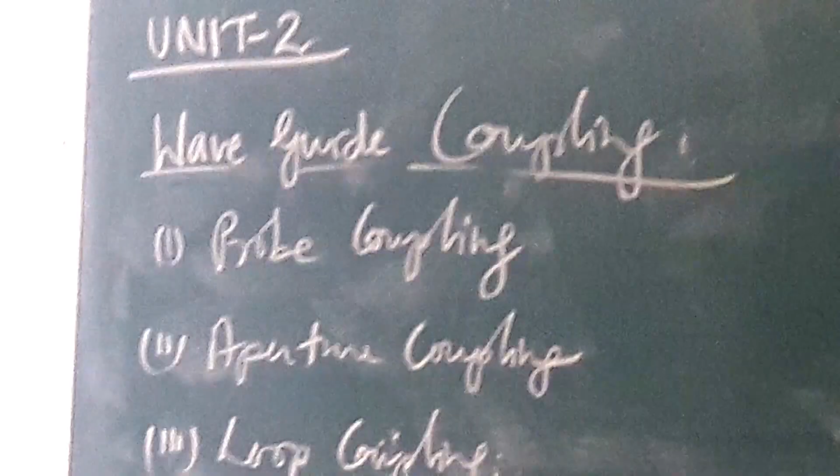Waveguide coupling. Coupling means we are coupling two or more waveguide components so that we can transfer the energy in or out of the component.

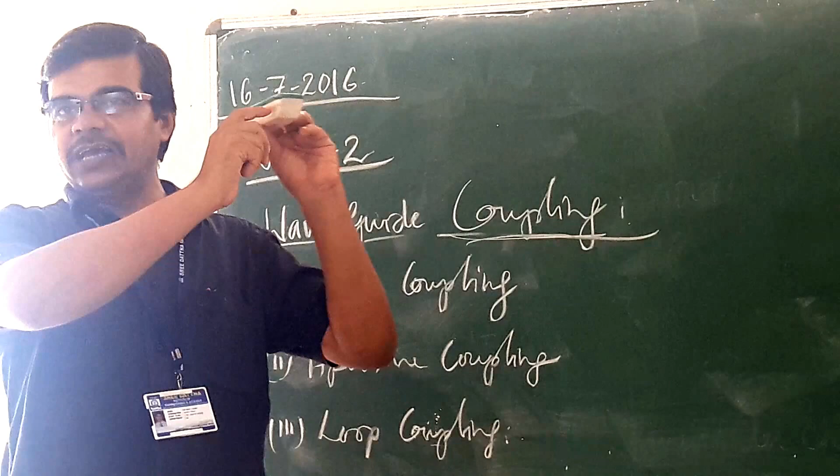Suppose you have one waveguide and you connect some other component to it. You know that in your waveguide you have electric field and magnetic field flowing. So either I can take a part of that energy out, or from this coupling component I can insert some energy into this waveguide. That is the activity we go for in coupling.

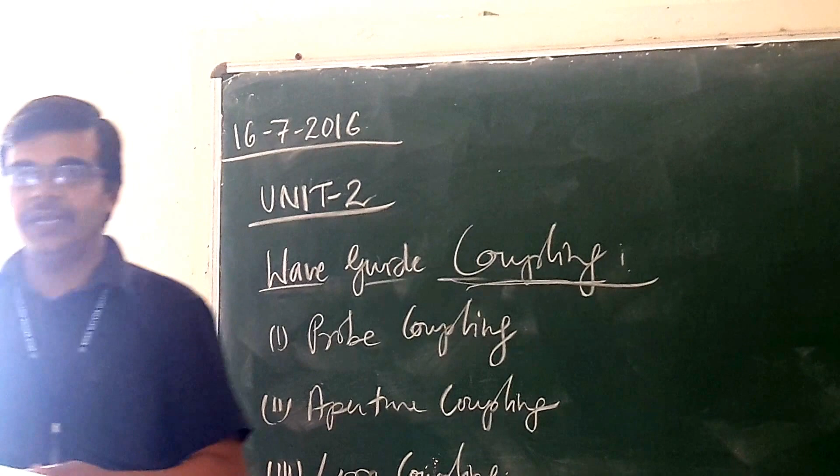If we go for waveguide coupling, we generally have three different types: the first one is probe coupling. In probe coupling, we couple the waveguide with respect to a coaxial line.

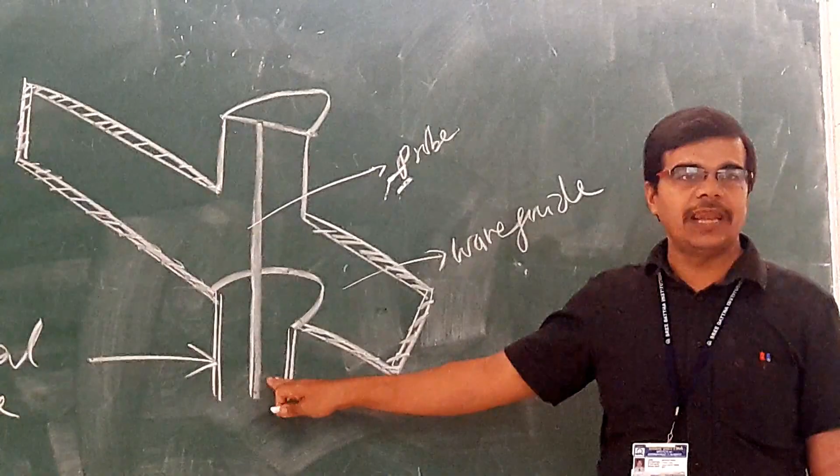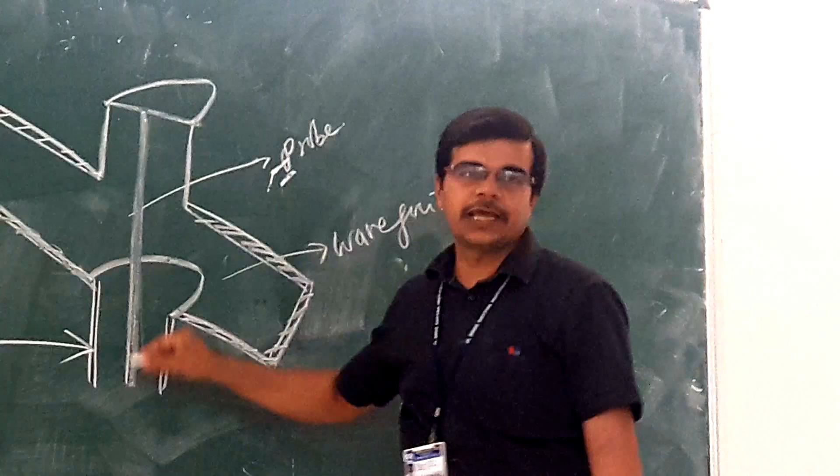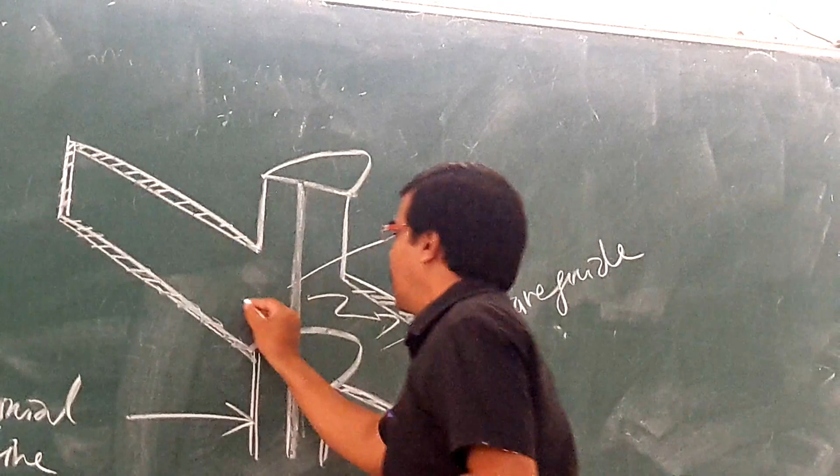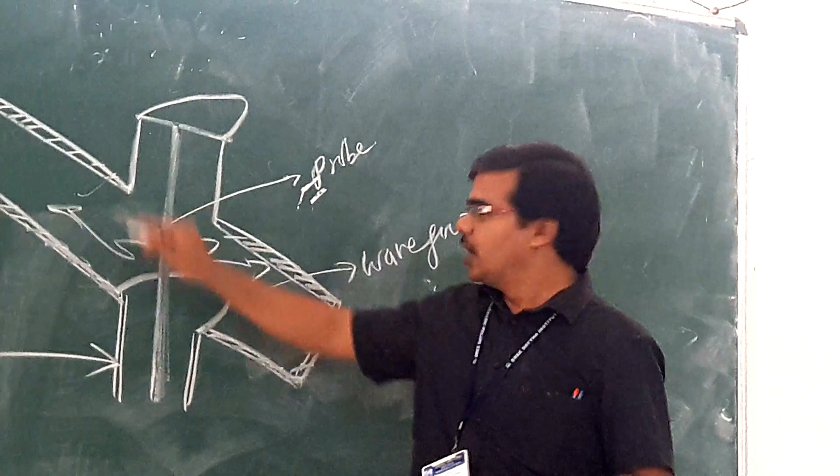This is your coaxial cable and this is the inner part of your coaxial cable. Since this coaxial cable is metallic in nature, we can use this probe for transmitting the energy into the waveguide. There is equal distribution of energy from this probe to the waveguide, so we can say this probe acts like an antenna.

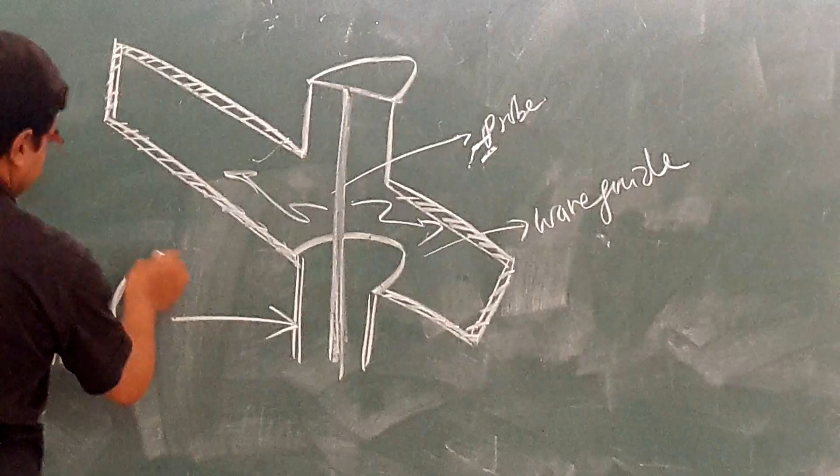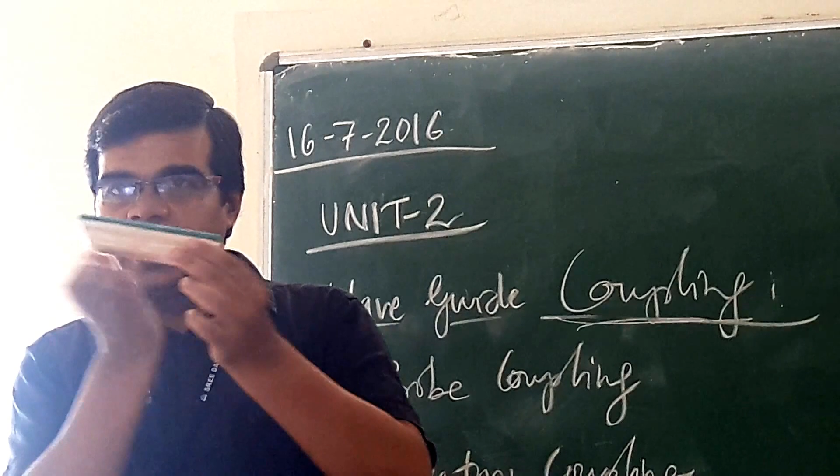Now looking at this probe, assuming this is your waveguide, whenever we insert the probe we insert it at the wider side. This is the wider side - here we have to insert it, not on this side.

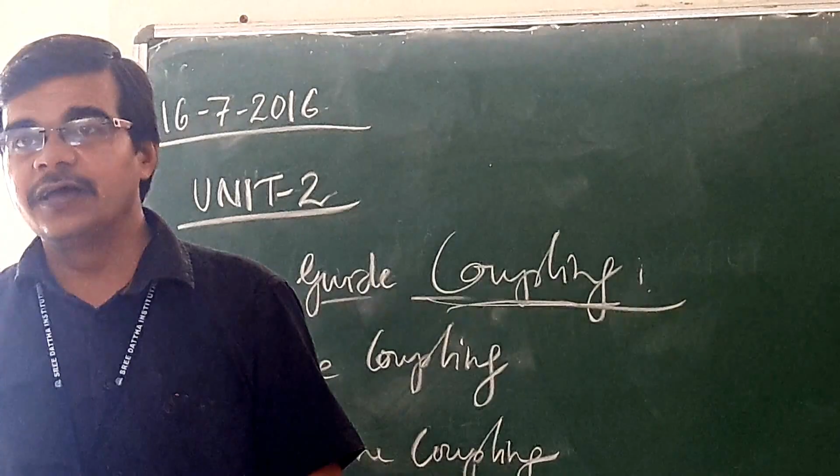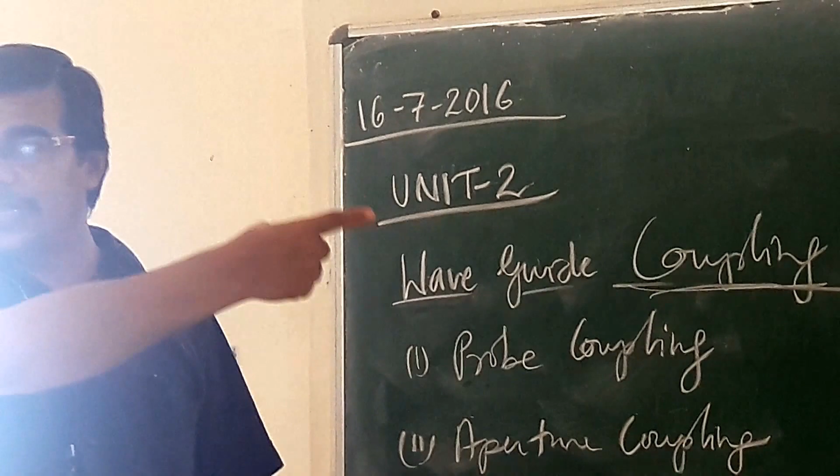Whenever we insert at the length side, it should be at a distance of lambda g by 4. What is lambda g? If you have this waveguide, you first calculate the guide wavelength for that waveguide, and then you can calculate at what distance you have to insert the probe.

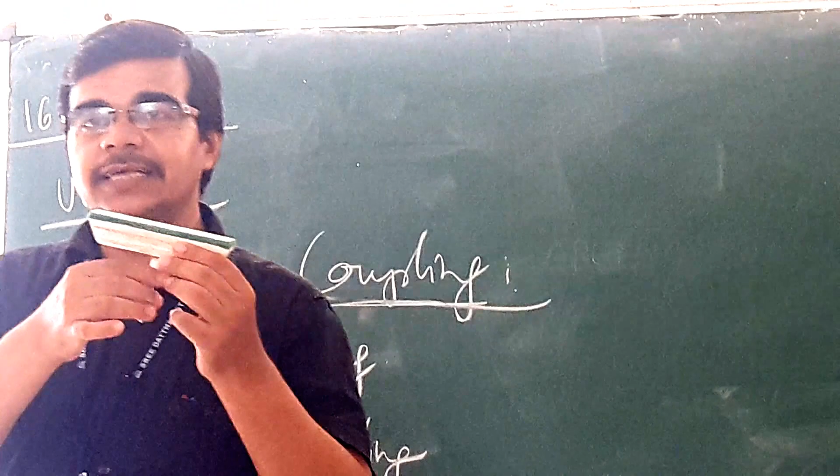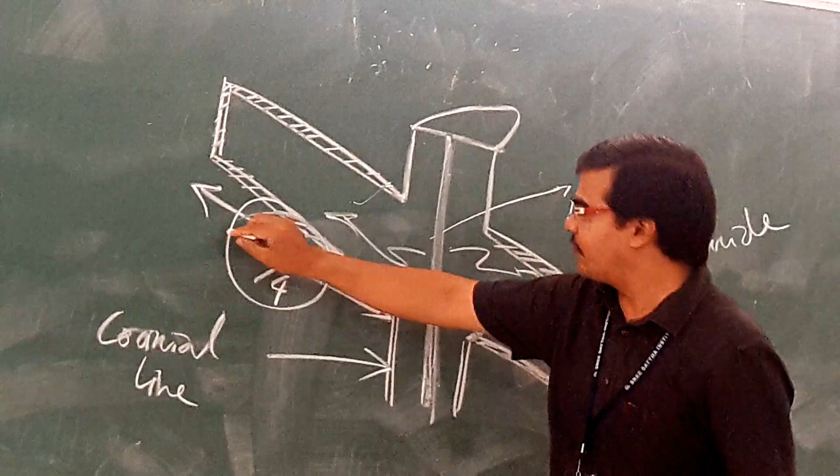Whenever we insert the probe, we have to insert it at the center of the wider side. When we insert it at the center, at a distance of lambda g by 4, it will perform well.

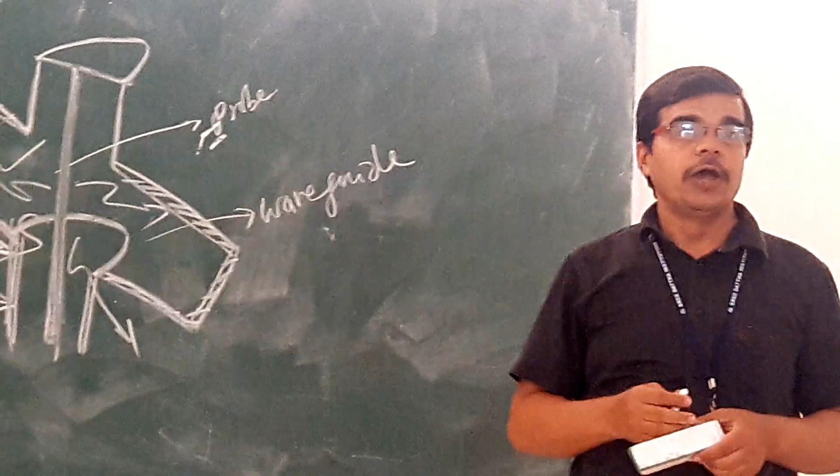If we don't follow this, there may be chances of mismatching between these two components, and some energy may escape. Ideally this is not required - we want proper matching. To have proper matching, it should be at a distance of lambda g by 4, at the wider side, and at the center.

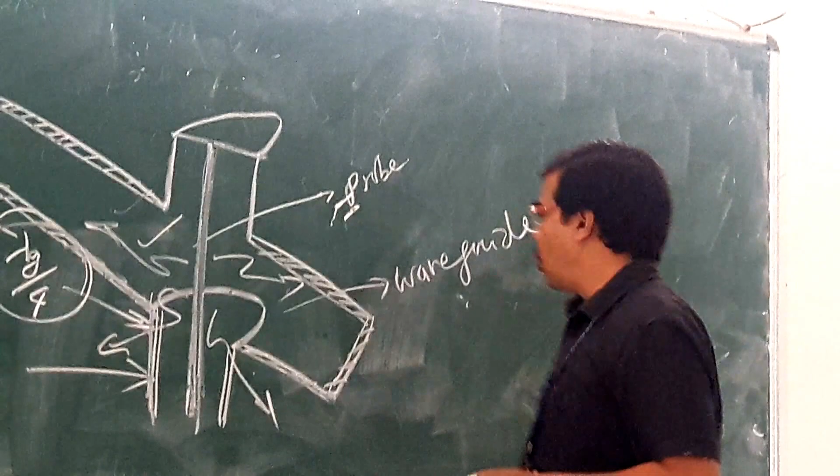If we see the probe, it is parallel to the electric field, which is concentrated at the center. You will not have that much electric field elsewhere, only at the center it is concentrated. So as the electric field is concentrated at the center, we insert the probe there. As it is parallel to the field, probe coupling is also known as capacitive coupling.

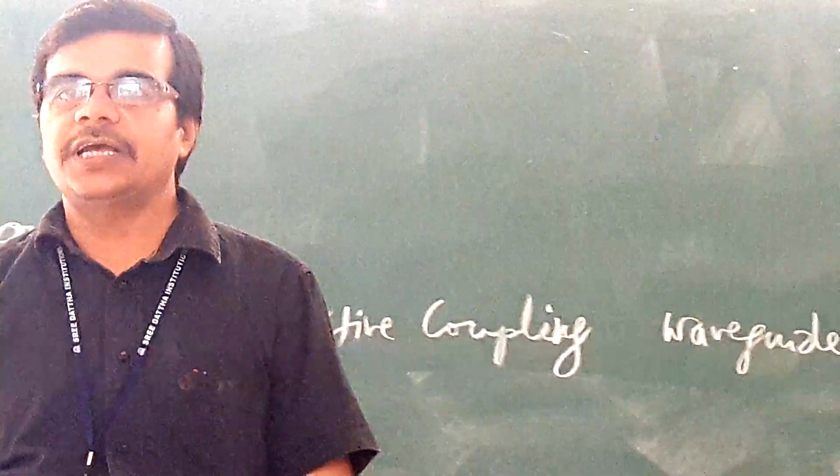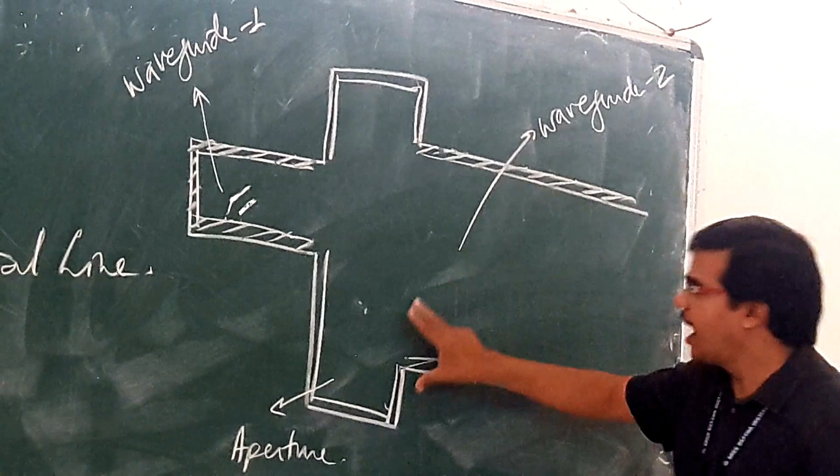Here we go for aperture coupling. This is also one way of coupling between two different components. Here we have two different waveguides having different physical dimensions, and we couple them. In a waveguide, energy exists in the form of electric field and magnetic field.

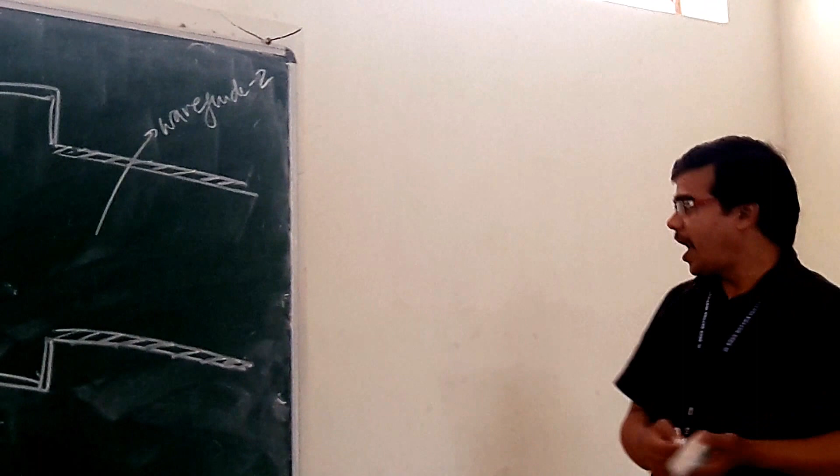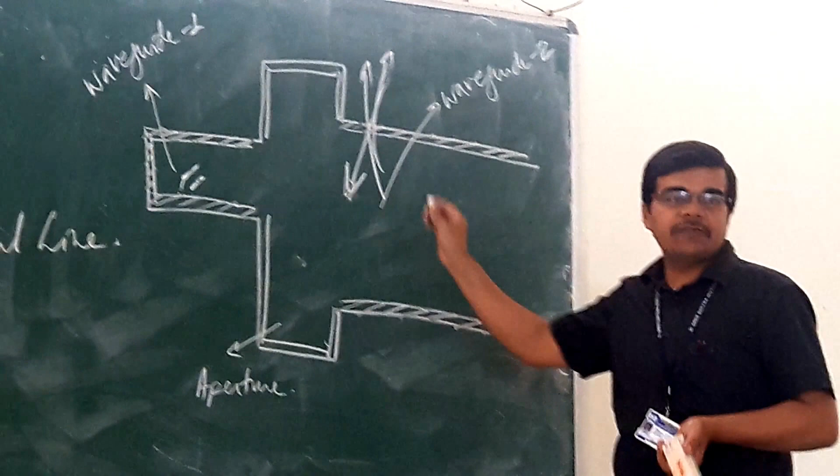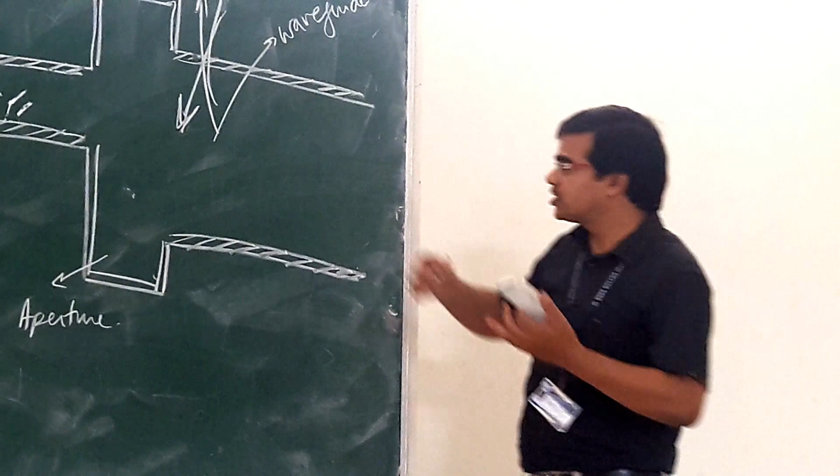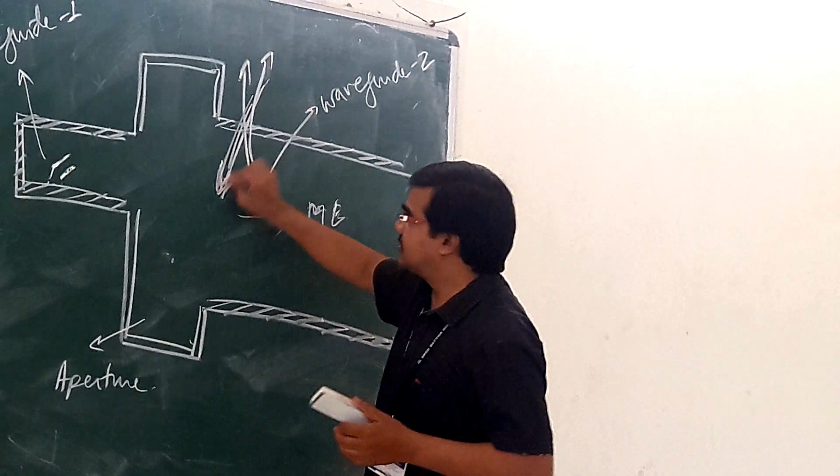Through this hole, the electric and magnetic field get disturbed, so you get uneven distribution of the electric and magnetic field. Where you have more electric field or more magnetic field, on that side you will see the transfer of energy taking place. By inserting the hole, we disturb the balance - some energy escapes through this hole, and the distribution of energy becomes imbalanced.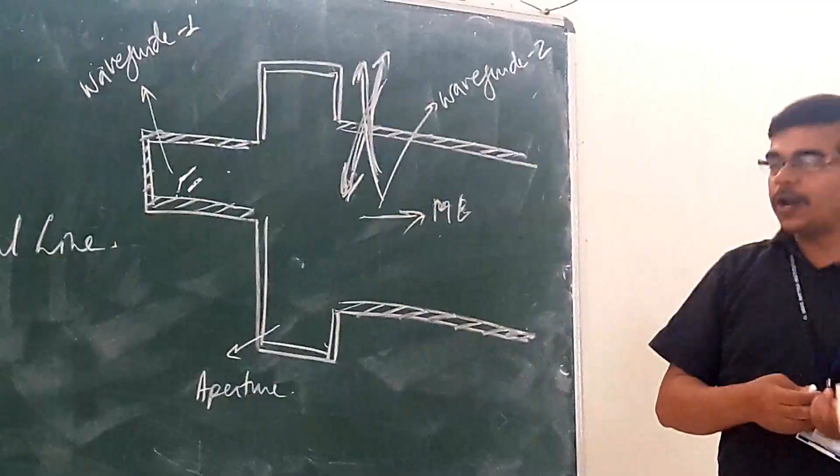This is your aperture coupling, which is also known as slot coupling. Next is loop coupling.

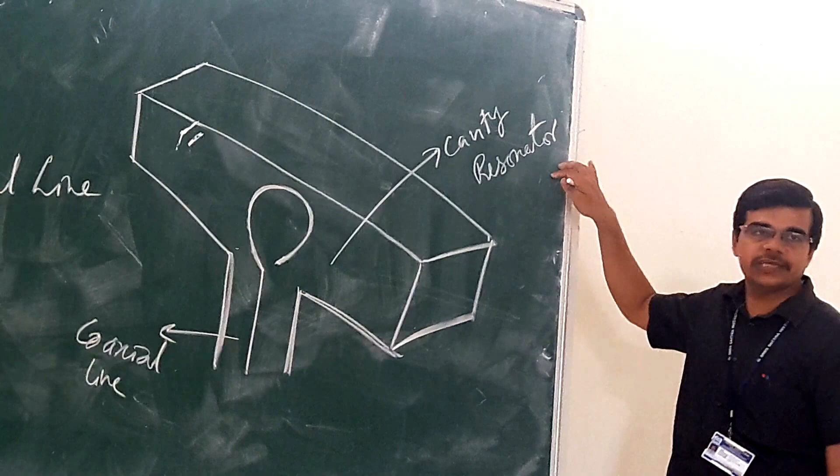Whenever we go for loop coupling, it is the coupling between a cavity resonator and a coaxial line. In probe coupling, we have waveguide and coaxial line; here we have cavity resonator and coaxial line. So what is the difference between the waveguide and this cavity resonator?

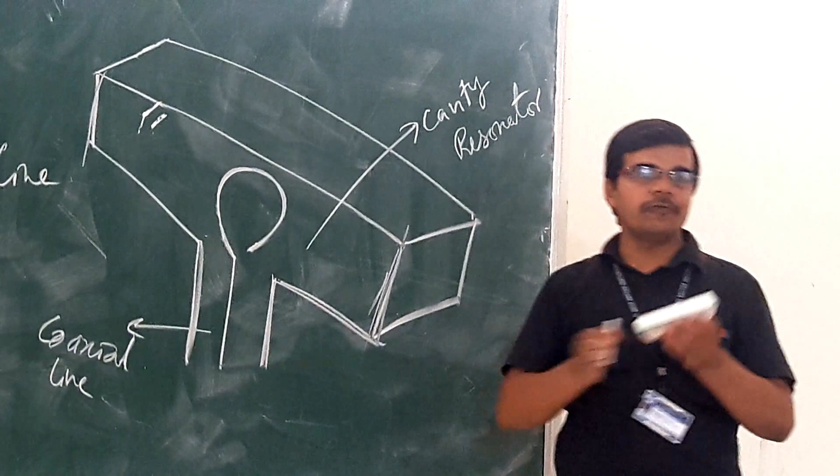The cavity resonator has a finite length - this block shows that it is of finite length. In other words, from a waveguide we can take a part and form the cavity resonator. We go for coupling here.

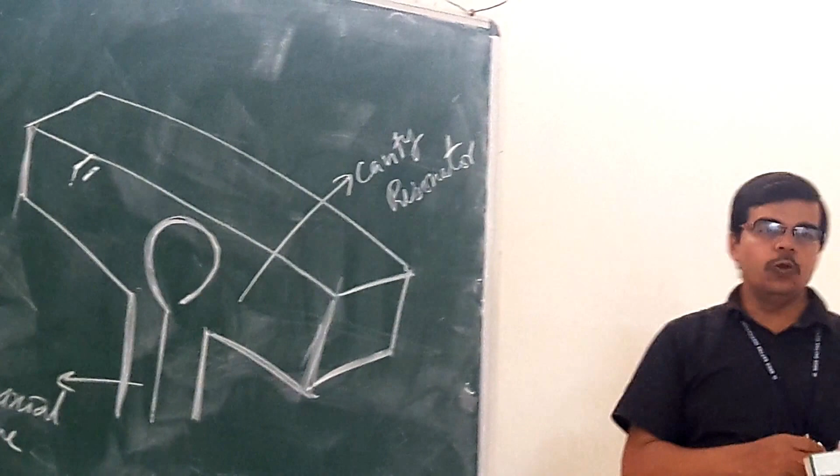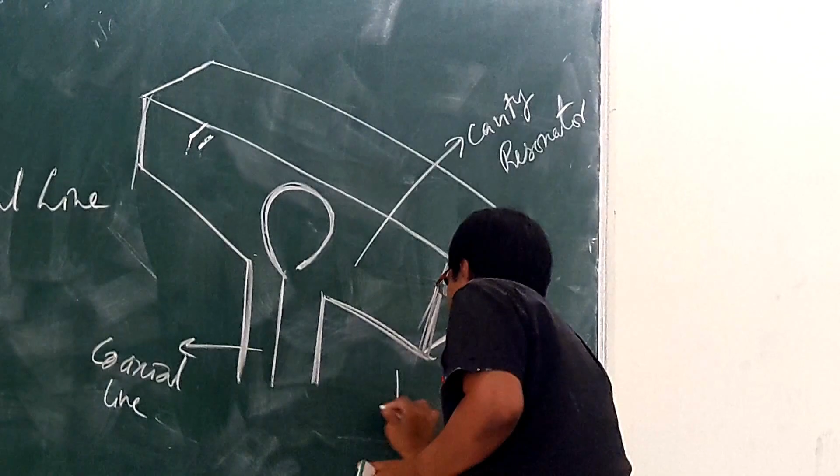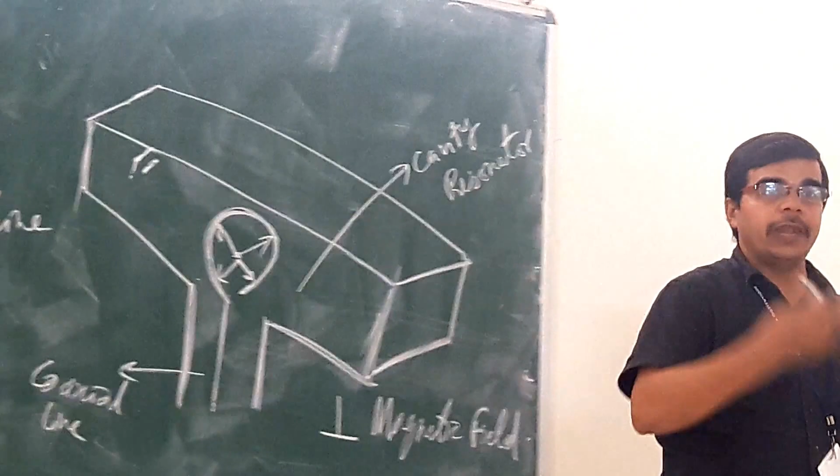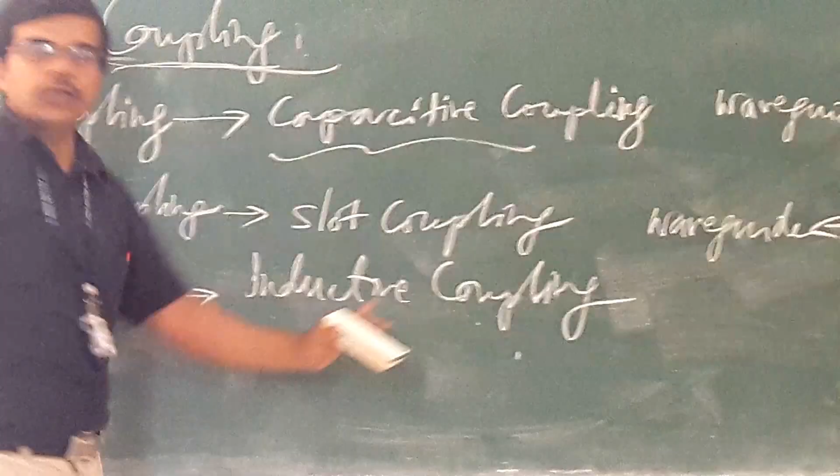Here we have something like a loop. Loop means this is your probe only, but we have made it in such a way that it forms a loop, and we make the loop so that it couples to the magnetic field. We see the degree of coupling depends on the area of the loop - larger the area, greater the degree of coupling.

So here capacitive coupling, here inductive coupling - the probe coupling with electric field, and the loop coupling with magnetic field.